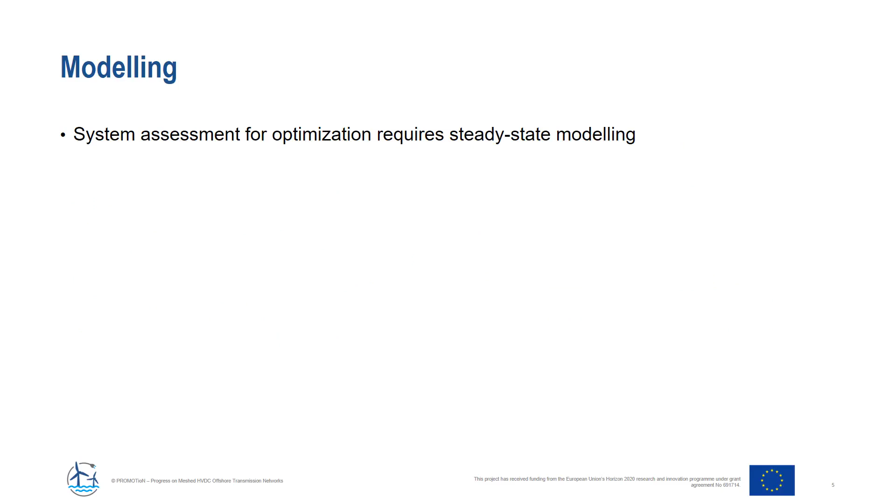It is therefore necessary to develop a security-constrained optimal power flow, or SCOPF, for interconnected meshed AC and DC transmission systems, which will be able to fulfill these requirements and which will be presented in the following. The SCOPF requires a steady-state modeling of the transmission system and the installed equipment. The most important models are therefore introduced on the slide.

The generation units are limited by their minimal and maximal set points for the active and reactive power outputs. Renewables aren't that flexible because of their external weather dependence. They can only be curtailed. Furthermore, offshore wind farms are linked to their corresponding converter via a constraint to allow for simultaneous set point changes. The cables and lines of the systems are named branches in this method, and their thermal design limit is modeled with a maximum allowed current over the branch.

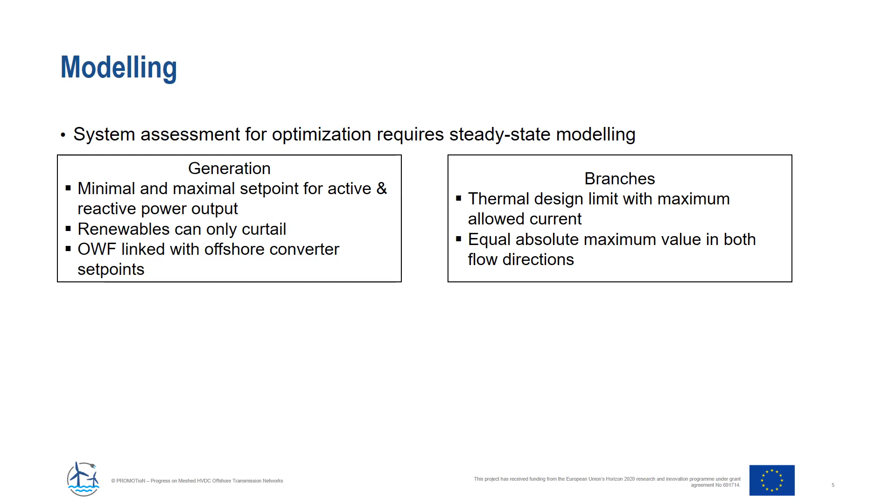The converters connect the AC and DC transmission system and are modeled as individual injections into the respective system, similar to a generation unit. They also have a minimal and maximal set point for their power output. Additionally, the sum of all converter set points per DC system has to be 0 at the moment, so they are lossless.

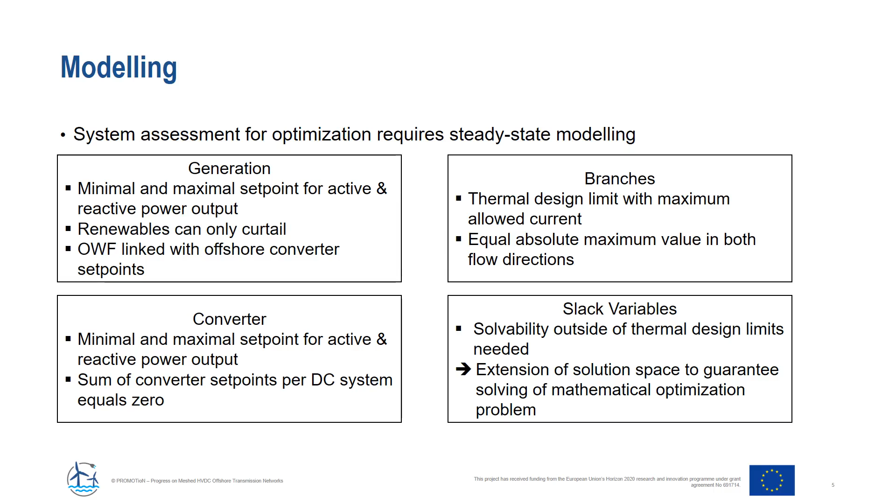To ensure the solvability even when a violation of the thermal design limits and therefore congestion still exists, slack variables are introduced. They extend the solution space to guarantee a solving of the optimization problem. Giving them high costs within the objective function ensures a minimal use in the result.

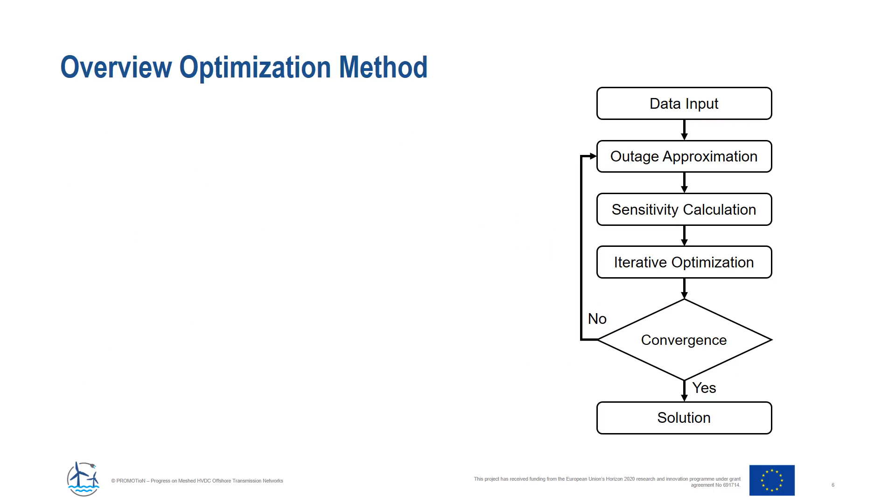The final optimization method consists of several modules. At first, all the relevant input data has to be loaded and processed. The next module is called outage approximation and assesses the fully meshed AC and DC systems during a contingency situation with a virtual power injection method. The result is an approximation of voltages and currents in the system during an outage. Outages that can be considered at the moment are the failure of AC or DC branches as well as of converters connecting the system.

In the next module, the sensitivity calculation, the linearization of the nonlinear optimization problem occurs. With the information of the outage approximation, all the necessary sensitivities or power distribution factors are calculated. With all the information now available, the mathematical optimization problem is assembled with all the variables, constraints, and objective function. The objective is a minimization of the cost, therefore avoiding congestion in normal and contingency situations, as well as supplying enough energy for the existing load and avoiding as much curtailment as possible.

As the optimization of the AC and DC systems occurs unified, fast results with convergence can be obtained. If for some reason the result does not converge, the determined resulting set points are taken back and the optimization starts again with a new outage approximation.

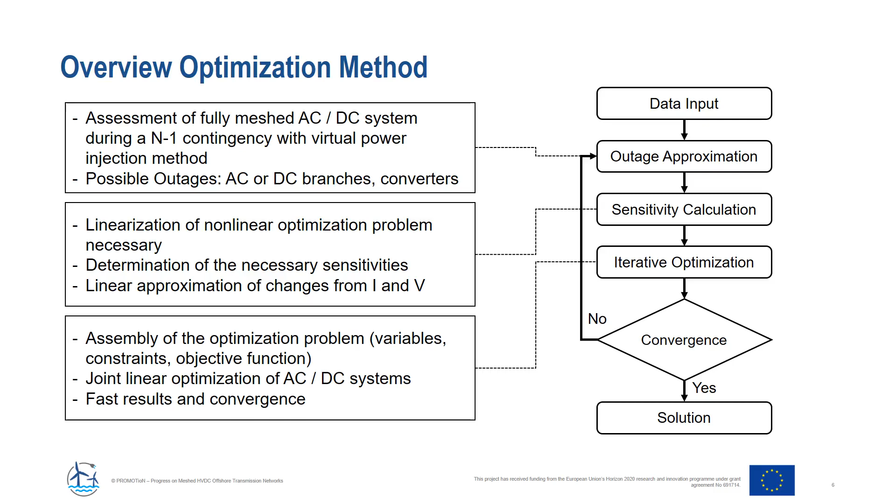In order to test the functionality of the developed SCOPF, a performance evaluation with the well-known IEEE 118 bus system has been performed. The test system is modified with a meshed HVDC offshore system, containing 3 offshore wind farms and 1 additional reduced AC system, which is asynchronous to the rest of the grid. The initial power flow calculation has shown congestion in the AC and DC system, which can be seen in gray in the diagram on the right side. The outage approximation determined additional congestion in a contingency situation, which can be seen in blue in the diagram.

After a run of the SCOPF, the set points of various generation units and converters have changed, with minimal curtailment at 1 offshore wind farm. The congestions in both systems are completely dissolved, which can be seen in the diagram in yellow and orange. The utilization limit of AC branches is supposed to be at 80% utilization or below, and for DC branches at 100% or below. Both can be achieved within a few seconds. Performance evaluations on bigger systems have shown similar results. The SCOPF is therefore working.

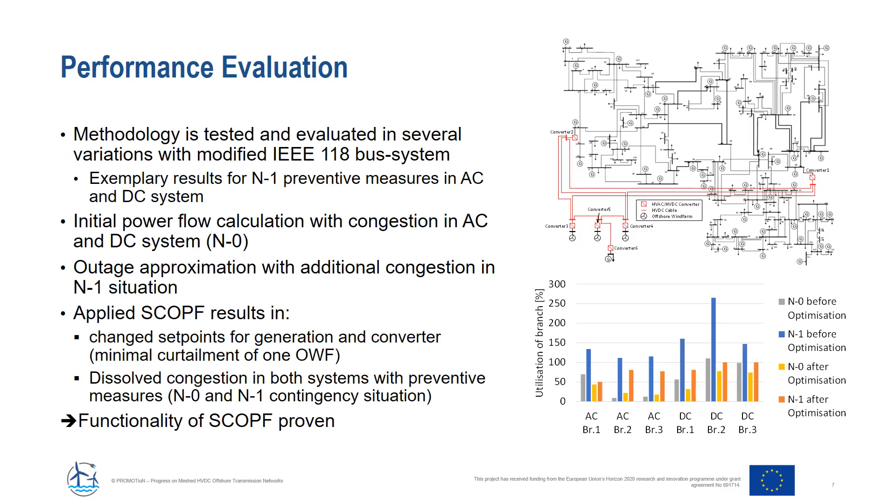I am now at the end of my presentation and will do a quick summary and outlook. In order to assess interconnected meshed AC and DC systems, a SCOPF is necessary. For the method developed in this project, the AC and DC transmission system are modeled in steady state. To obtain the relevant system values in a contingency situation, an outage approximation considers outages of AC and DC components.

The unified optimization is done in an iterative way for AC and DC in normal and contingency situations at the same time and leads to fast results. A performance evaluation with a modified IEEE test system has proven the functionality of the developed SCOPF. Future development will include the specific analysis of curative measures, as especially HVDC systems with their power electronics will benefit from them.

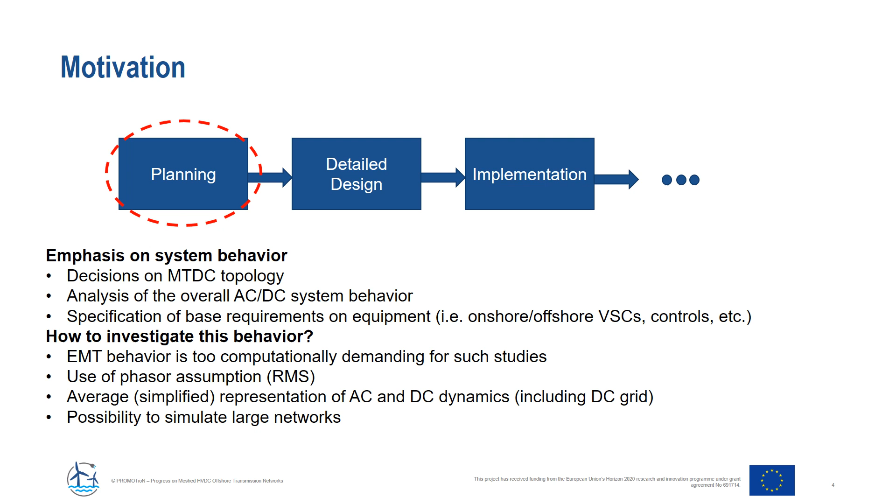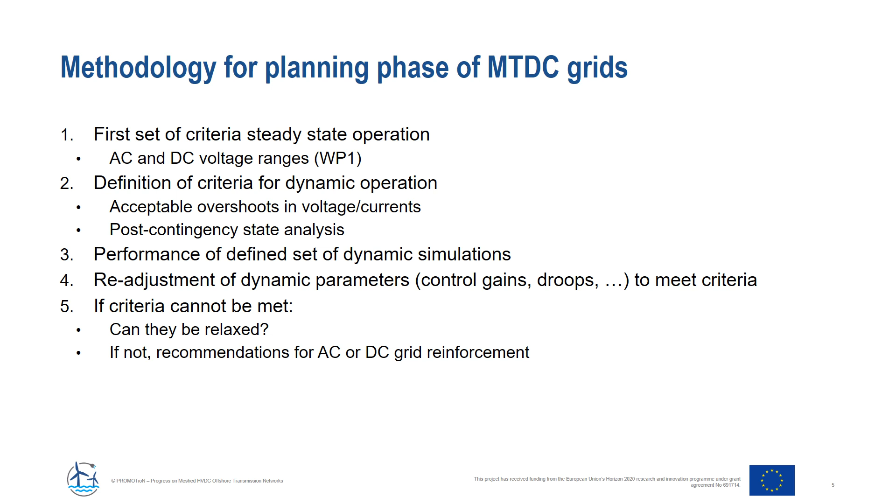Dynamic simulations are conducted and the performance of defined criteria is assessed. If needed, dynamic parameters such as control gains and droops can be readjusted to meet criteria. In case criteria cannot be met, it is analyzed if the criteria can be relaxed, and if not, AC or DC grid reinforcement might be required.

The test case considered for this project is composed of 3 MTDC networks running in parallel and interconnecting 3 AC areas, which are Nordic 44, Great Britain, and European systems. The considered operating conditions are normal operating condition and contingency operating condition. And the following 3 operating scenarios are analyzed: high wind, no power exchange through DC; medium wind, no power exchange through DC; low wind, high power exchange through DC.

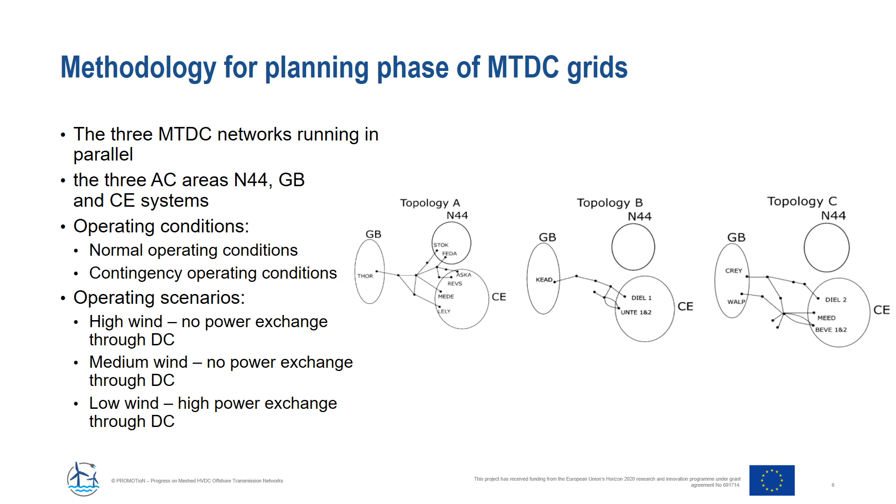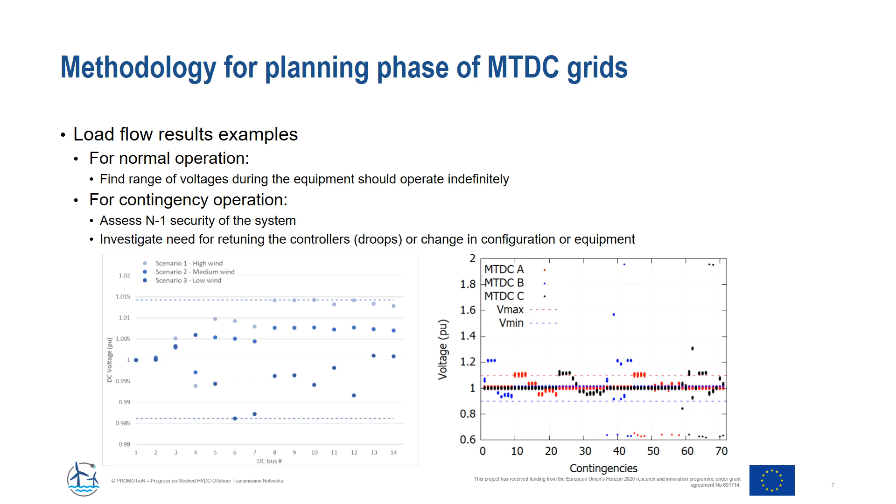An example of load flow result is presented in this slide. For normal operation, it is possible to find a voltage range in which the equipment should be able to operate indefinitely. For contingency operation, it can be observed that some points respect the defined voltage range, while others might require readjustment of control parameters or grid reinforcement.

The transient behavior is analyzed in Eurostag software. Several tripping events were simulated, but only results of case 3, tripping of a DC branch resulting in islanding of the MTDC grid, are presented in this slide. The results show the changes in the power flows of the lines as well as DC voltage variations. All simulations were found to be stable.

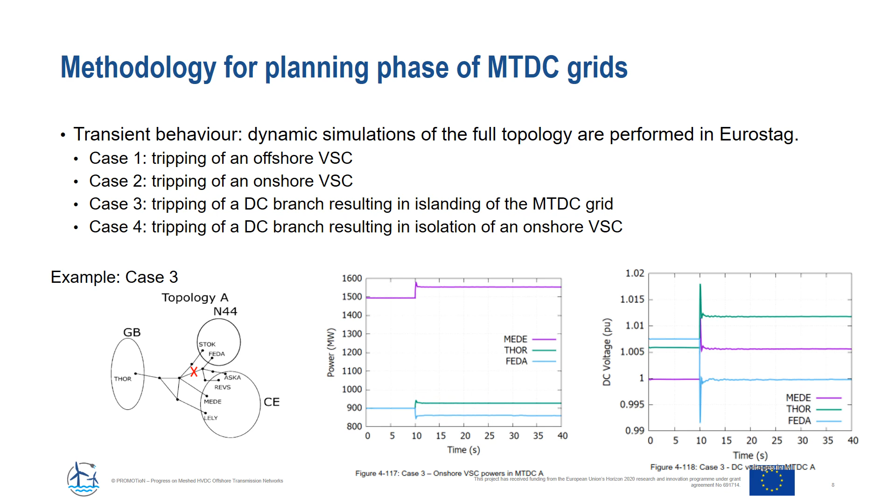The impact of the AC contingencies on the DC system was analyzed by simulating disturbance on the AC system. This slide presents the results for the AC case 2, 3-phase fault at the AC terminals of a VSC cleared after 100 milliseconds. It can be seen that the fault is seen in the main DC lines in the DC network, and the DC voltages also react to this event. The performed simulations were found to be stable.

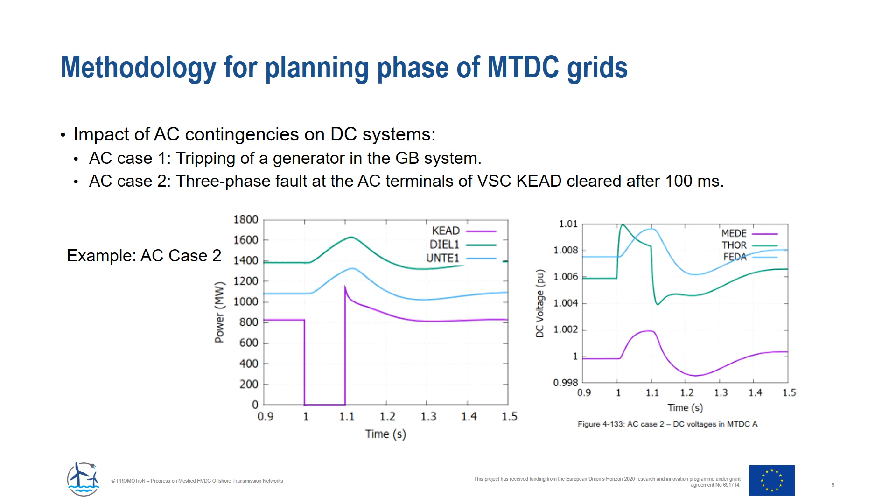The impact of DC contingencies on AC systems was analyzed by simulating DC events. This slide presents the simulation of tripping of an MTDC network. It can be observed that the power flows in the healthy parallel MTDC networks are redistributed and are able to successfully stabilize the AC frequency.

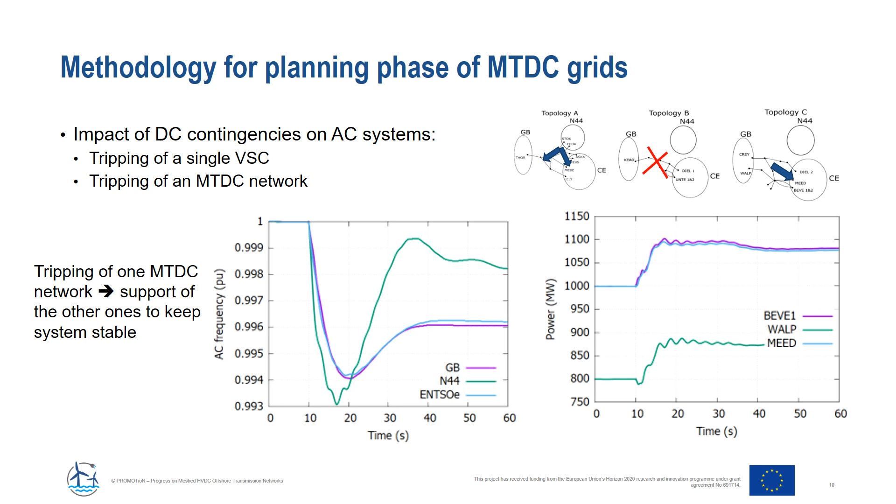It can be concluded from the performed work that RMS type tools allow simulation of large combined AC and DC systems within reasonable computation time and lower data requirement than EMT. The study provides indications regarding the normal and contingency operating conditions of the MTDC grid, such as assessment of the transient behavior at the system level, as well as the impact of AC contingencies on the DC system and impact of DC contingencies on AC systems.

The studies also provide high-level recommendations for the design phase, but for the design of a particular equipment, detailed EMT studies are necessary. The studies can be used to define a set of control parameters such as DC voltage droop gains and VSC control tuning, etc. And the studies allow assessment of post-contingency operating points and transient response for the AC side. However, the DC system transient should be verified with an accurate EMT model.